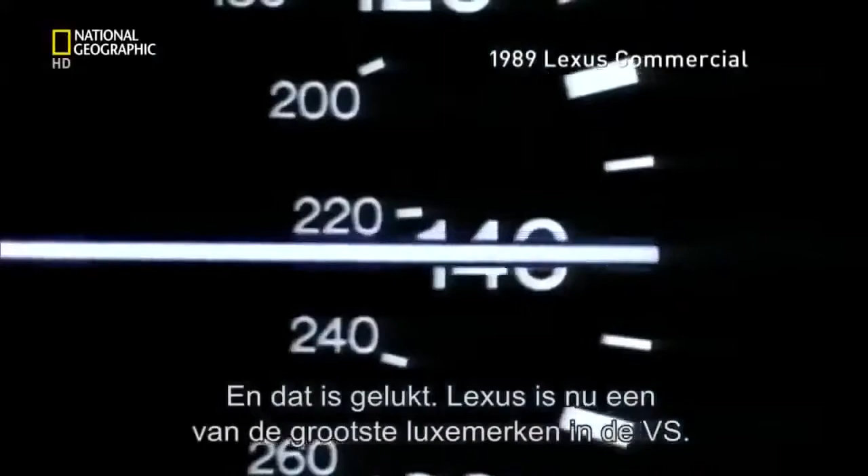Lexus is just over 20 years old. The world's largest car maker, Toyota, created the brand to compete with other high-flying luxury marques, Mercedes-Benz, BMW, and Jaguar. It's worked. Lexus is now one of the biggest-selling high-end marques in the United States. But now, Lexus is out to inject more excitement into their brand.

Chief Engineer Tanahashi Haruhiko is the man behind this vision. The LFA has a passion, an emotion that isn't in earlier Lexus cars. We wanted to move the brand in that direction. That's how we made this car. Tanahashi believes the marque can mean more than just luxury.

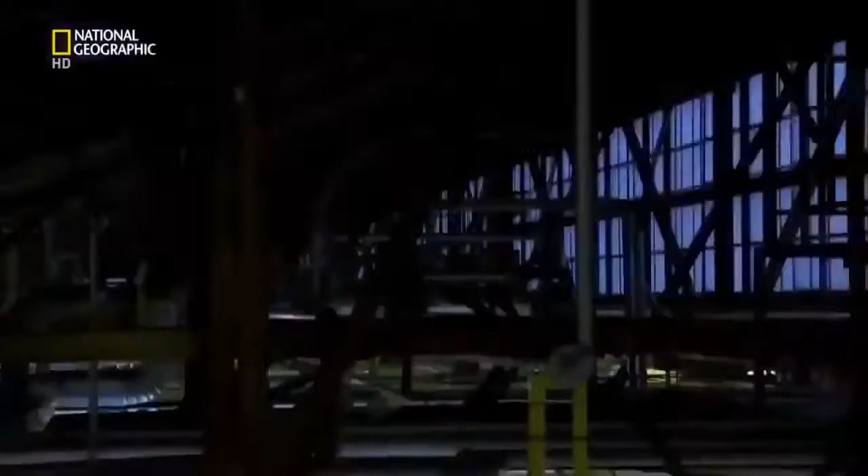I wanted to make a new sports car, one that could stand against the long-established European so-called supercars, Porsche, Ferrari, and Lamborghini, to show that we Japanese could make something like that. It's a risk. The company haven't made anything like this before. Their reputation depends on its success.

Chief Engineer Tanahashi is stepping into the unknown. He must build a car, a team, and a factory from scratch. Basically, we proceeded at my discretion. And where there weren't any rails, I laid them down.

Finding a factory in Japan isn't hard when you're part of the country's largest company. Toyota is so big, they even have their own city, Toyota City. Of the company's 15 Japanese factories, 10 are found in the city or close by. Among them, the Motomachi assembly plant. The company transformed two unassuming blocks of this megafactory to create the LFA. They then scoured Toyota's 50,000 Japanese workforce to handpick just 175.

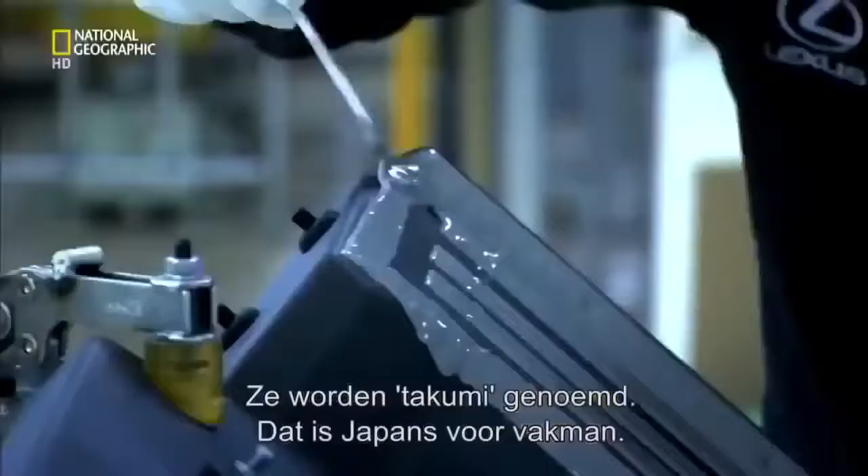All the associates here at the LFA Works feel they are artisans, not just operators. These artisans are known as takumi, Japanese for craftsmen. A status only conferred on the most highly trained, skilled workers. Each and every associate at the LFA Works is seeking to achieve perfection, taking this challenge on with a sort of samurai spirit.

Yamanaka Shigeru is manager of the LFA Works. His teamwork credentials come from another time-honored Japanese tradition, baseball. Before this, I was working as manager of the Toyota Motor Corporation baseball team, which brought people together from lots of different... It was because I could manage that organization that I was made manager here.

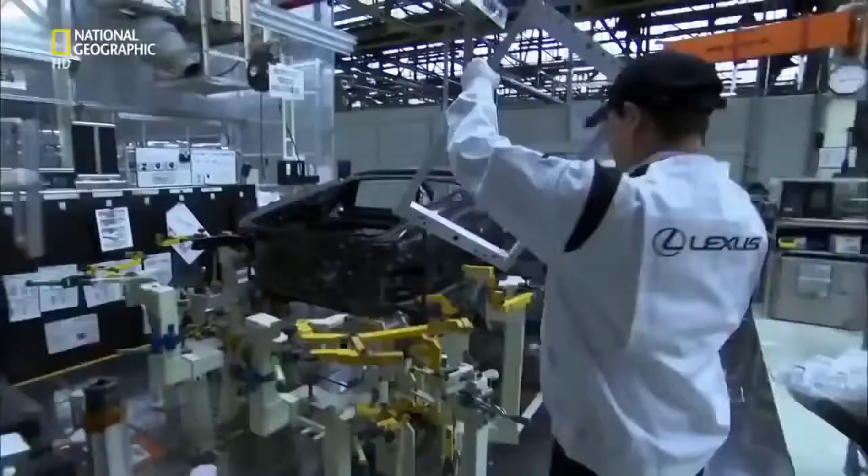To reach their goal, the tight-knit team utilize sophisticated tools and materials to build the car. The most important of these is carbon fiber composite. Carbon is crucial to the car's performance. It's a material 5 times the strength of steel, yet a quarter lighter. It's the construction material of choice for both Formula One racing cars and the aerospace industry. The company even make their own carbon fiber here on site. Up until now, no television cameras have ever been allowed inside this top-secret facility.

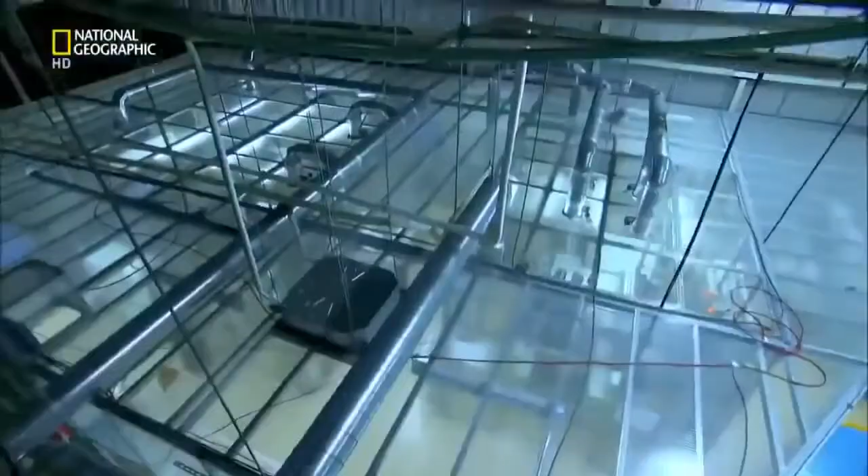First, simple strands of carbon fiber are woven into a pliable cloth using an automated weaving machine. This fabric is then transformed through heat, pressure, polycarbonate resin, and labor-intensive techniques into the car's core known as the tub. The tub is pieced together like a 3D jigsaw.

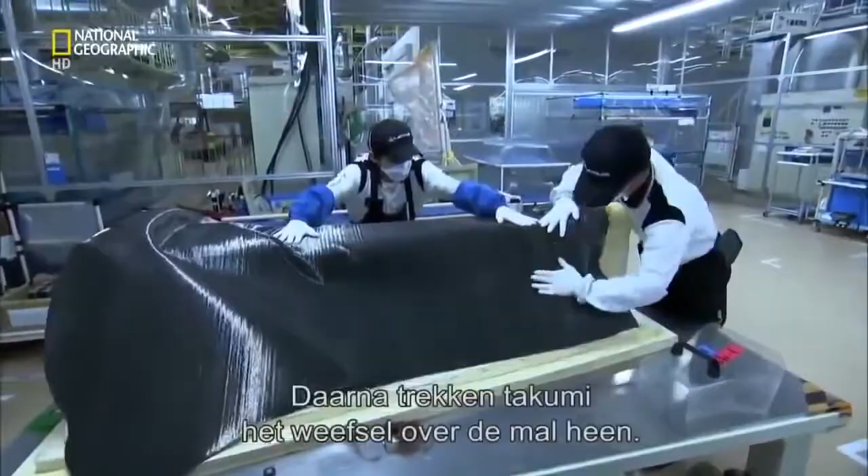It starts with the construction of the floor. To make it, precisely cut carbon fiber cloth is lifted onto a mold. Next, skilled takumi smooth the supple fabric over the mold. This one is for the transmission tunnel that will house the drive shaft and exhaust.

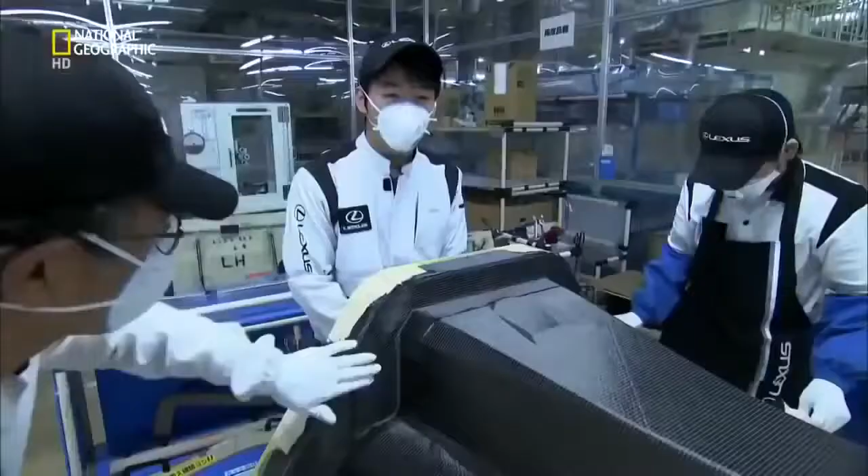In very complex areas like this, the fabric inevitably becomes frayed and not very neat. The associates work with these areas as if working with silk, taking great care every day. They also wear masks to avoid breathing in the hazardous fibers. In the beginning, the associates found it very difficult to work this material. It was much easier when they used an iron.

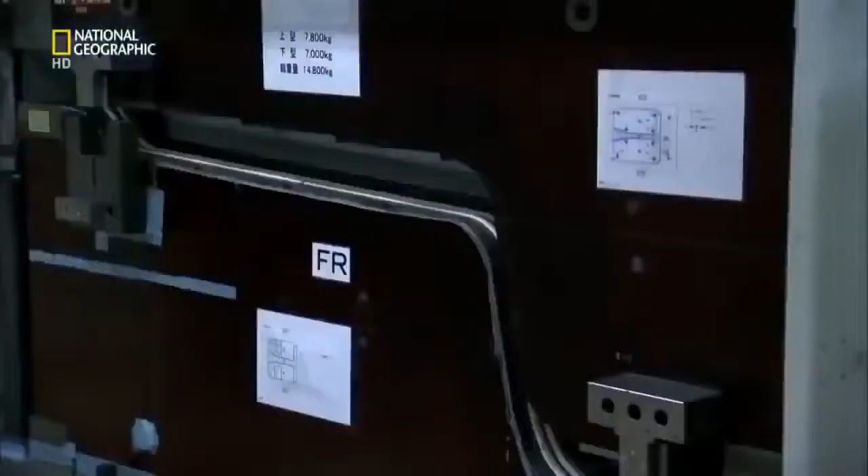The completed part is pre-heated to set its shape. It's then fitted into a template, along with 7 other floor parts, and inserted into a 1,000-ton press. A glue-like resin is pumped into the template, and the whole section is then baked for 8 hours at 130 degrees Celsius. Under this pressure and heat, the resin sets hard, binding the individual parts together to produce the car's floor panel.

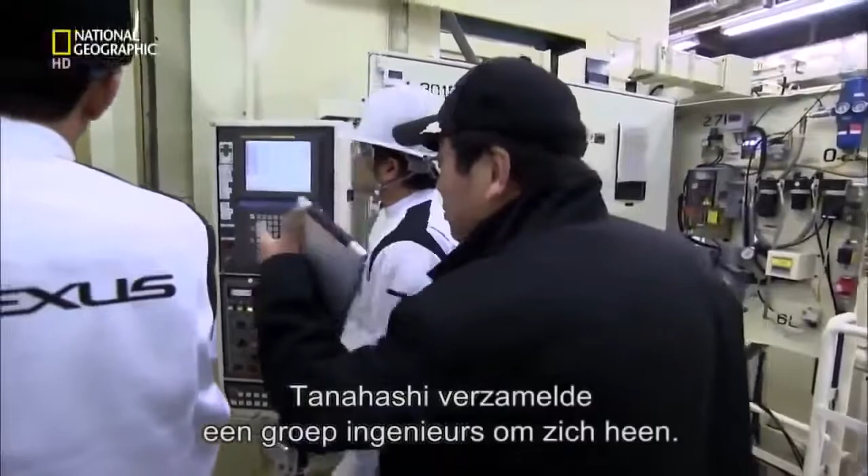Back in 2000, the concept of a world-beating supercar only exists in one man's head. At the company, I talked to just a small group of people at the top, not expecting anything, and they said, go ahead and try. With permission to proceed, Tanahashi gathers a team of engineers around him, and they start to make the basic engineering decisions. In the beginning, we planned to make the body from aluminium.

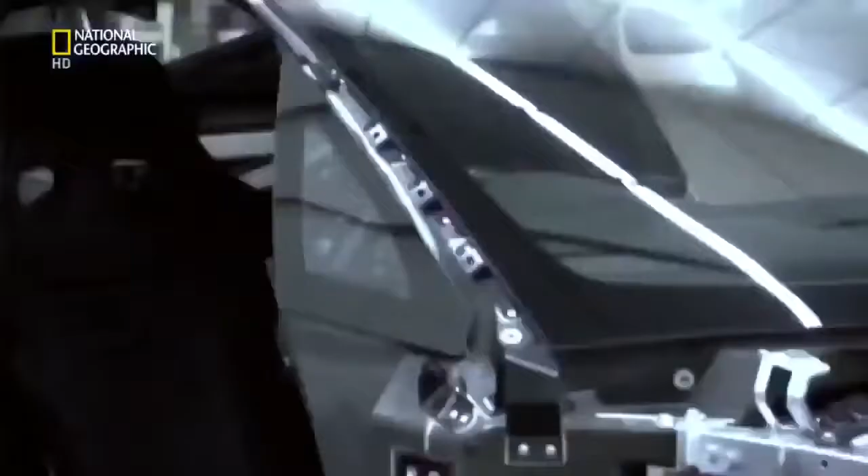But Tanahashi is fascinated with the possibilities offered by carbon. Developing a supercar, a super sports car, carbon fiber was a material I really wanted to try using, if at all possible. But this wonder material has its drawbacks. It's expensive, and the company has never used it to build any of their cars before. Despite these significant challenges, Tanahashi gets his way.

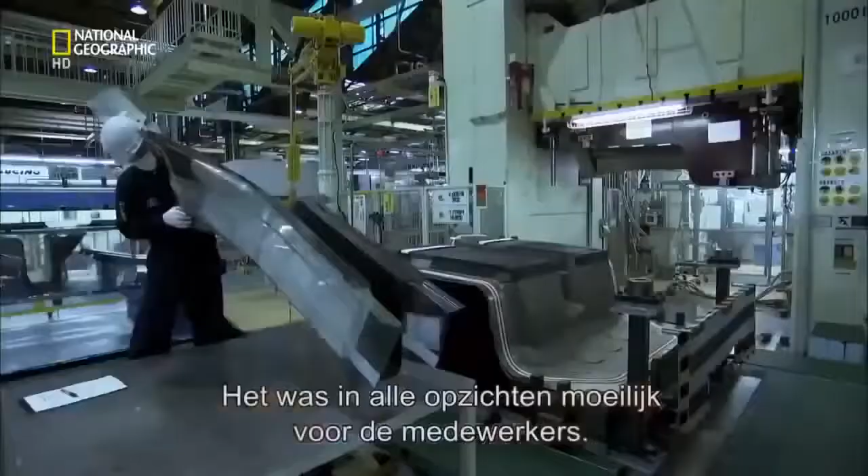In 2005, my boss said, why not go for carbon? Slapping me on the shoulder. And I made the decision to go for carbon then. It's a bold step. Everyone involved with this project must master a material they have no experience with at all. It was the first time the workers had touched carbon, and everything about it was difficult for the workers.

In the state-of-the-art carbon fiber facility, the Takumi are returning from lunch. They vacuum themselves down to remove any foreign particles before entering a highly confidential sealed room. Here, the majority of the tub's central frame is created using the most intricate techniques. In this process, an automated laser cuts out hundreds of individual shapes from carbon fiber cloth that's been pre-impregnated with a sticky resin.

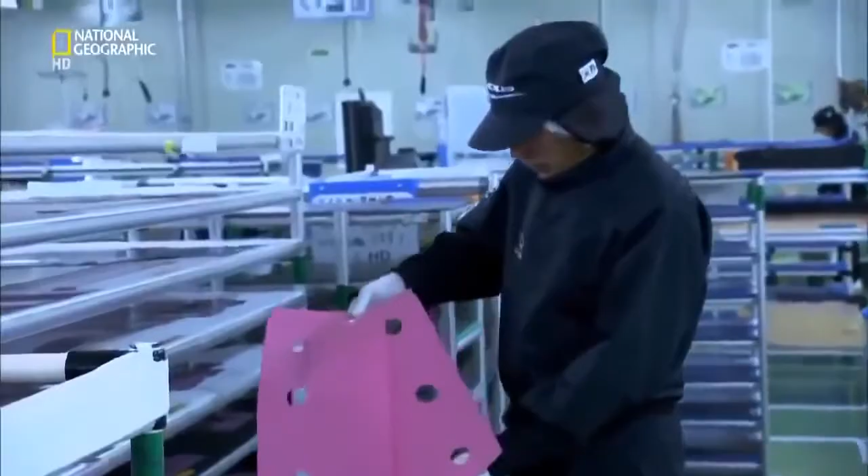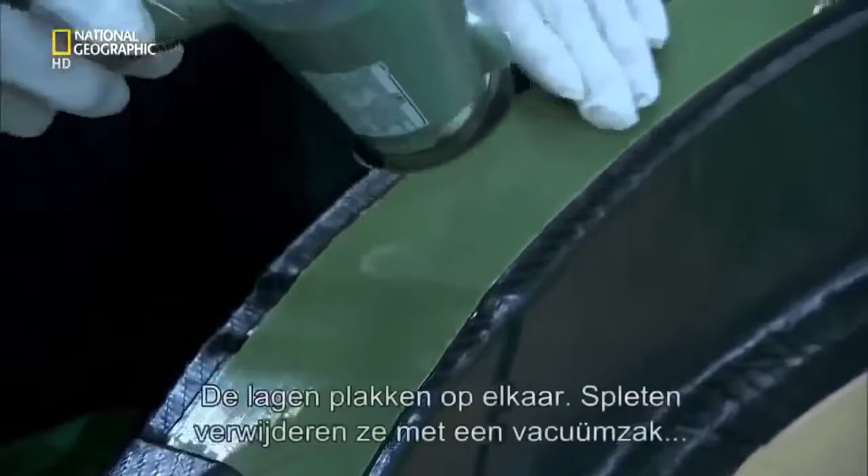Next, Takumi layer the cutouts, up to 20 sheets deep, onto a mold. This one will make the right side panel. The associate uses a dryer to raise the temperature of the laminate and half melts the resin as he applies it. The tacky cutouts stick to each other and any gaps are squeezed out using a vacuum bag that forces them together.

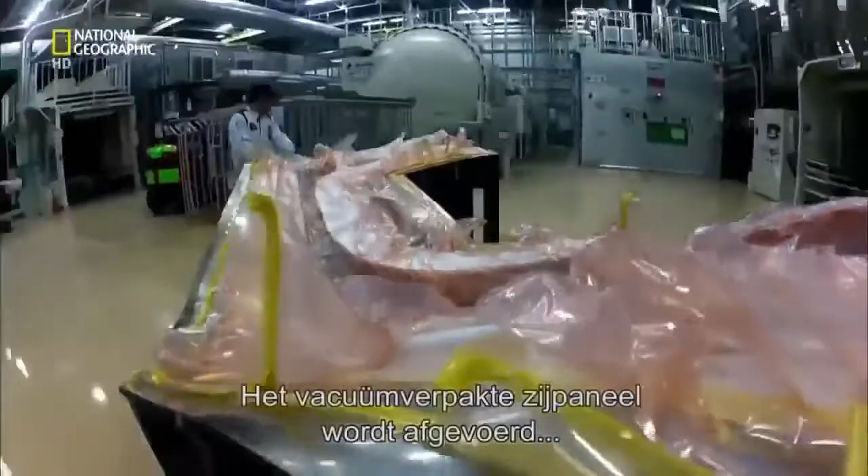The shrink-wrapped side panel is then wheeled across the works and loaded into a pressurized oven. Baking overnight at 150 degrees Celsius sets the resin, resulting in a side panel that's both ultra-strong and ultra-light. An aluminium equivalent would be twice as heavy. Weight saving is the holy grail for all auto engineers. Less weight and more power leads to increased acceleration, and speed defines a supercar.

The body of the LFA is 65% carbon fiber, helping it accelerate from 0 to 100 kilometers per hour in 3.7 seconds. If made of aluminium, it will be 100 kilograms heavier, like having a sumo wrestler in the passenger seat. As it is, this car weighs just 1,400 kilograms all in.

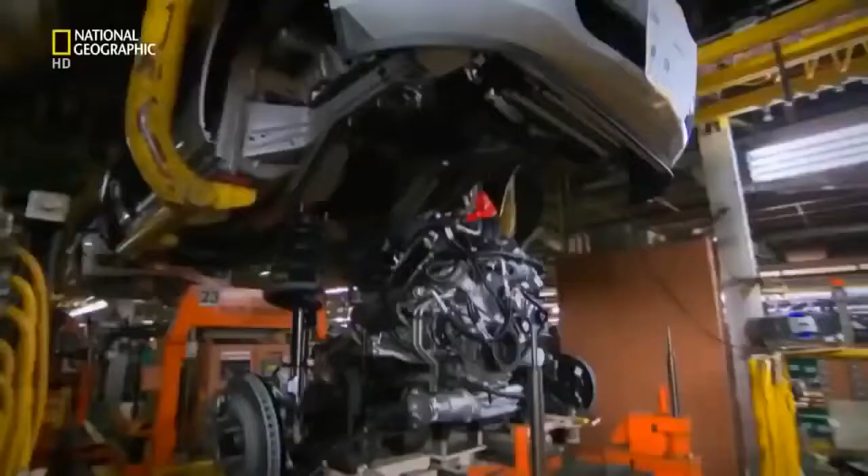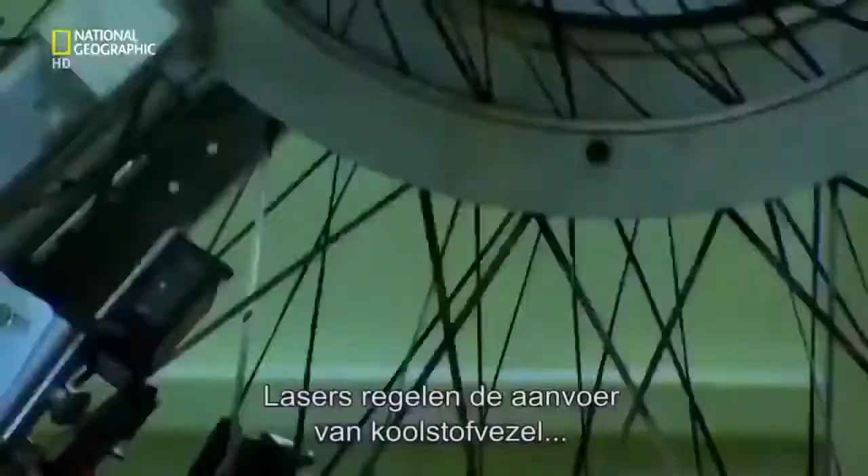Back at the factory, in a locked room, a bespoke machine creates two crucial parts to complete the tub's construction. The roof rails support the windscreen, as well as protecting the driver if the car rolls over. This custom-built circular loom weaves the carbon rail in 3D. It uses lasers to control the feed of carbon fiber strands onto 144 bobbins. These knit the carbon around a top-secret automated template that's fed through the center of the loom. This is done twice over to cross-hatch the carbon weave, so giving the rail its strength.

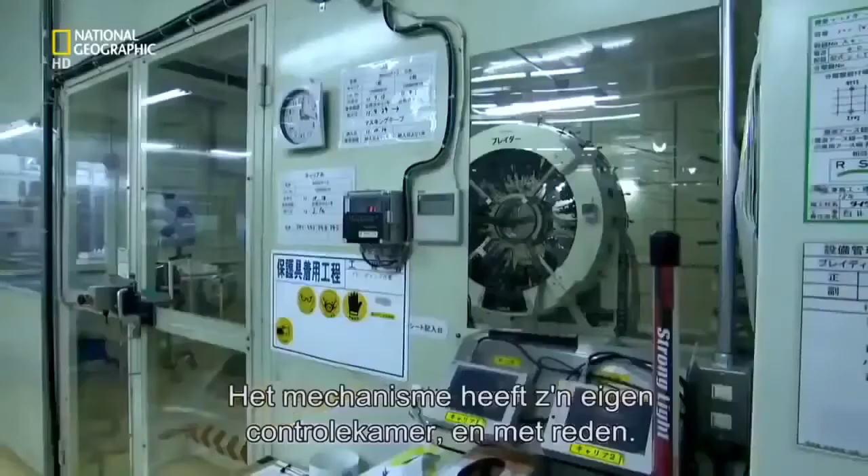The whole mechanism has its own control room, and for good reason. If something goes wrong, even a little thing, the shape gets distorted immediately, so the operator constantly pays attention to avoid this. The roof rail is heated and impregnated with more resin to complete its metamorphosis from a flexible tube to a rock-hard rail. You may think that this is quite heavy, but it is only 2 kilograms.

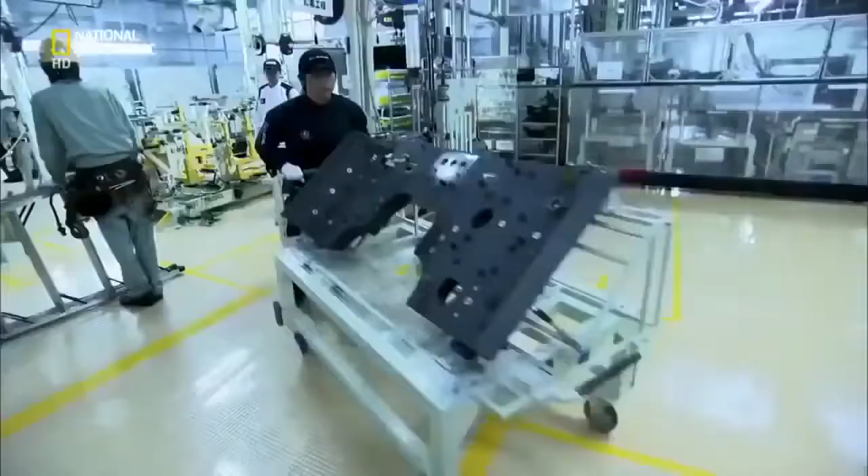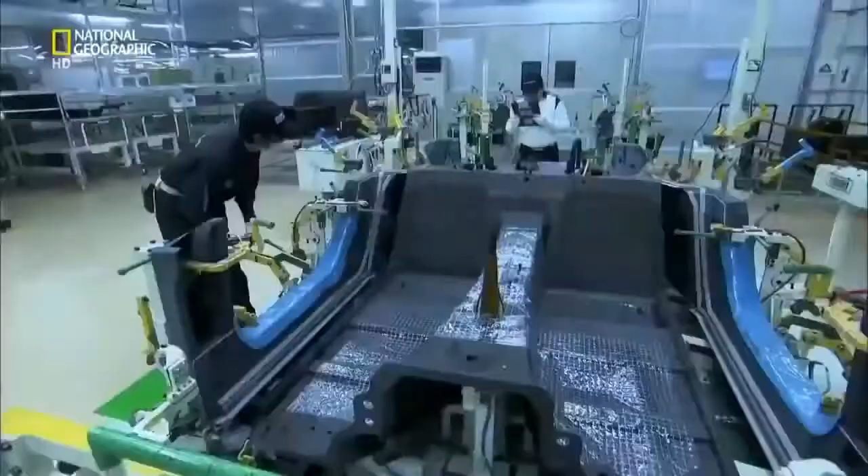The tub is bonded in another top-secret jig. First, a super-strong adhesive, known as epoxy resin, is applied by robot and hand to each of the parts. The separate parts are transferred to the jig and locked in place. Pop rivets keep the pieces aligned. To cure the epoxy, the jig is pushed into an oven and then baked for 60 minutes at 60 degrees Celsius. The resulting tub is so strong, it acts as both the structural core of the car and as a crush-resistant safety cell, should the car crash.

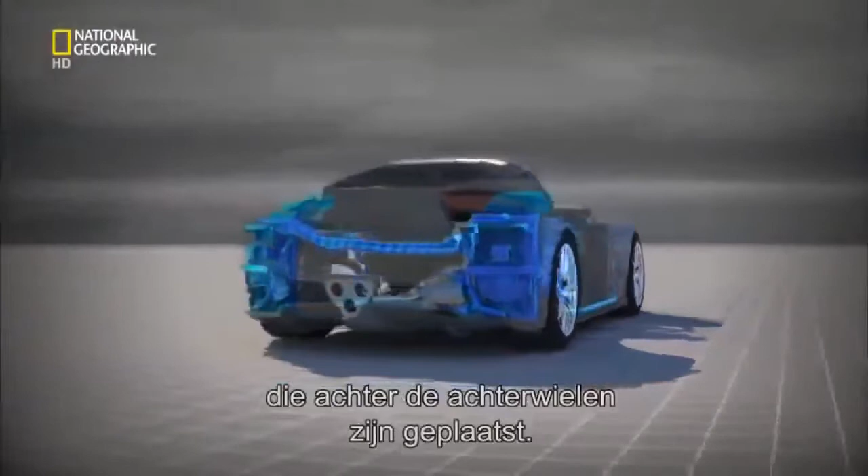The challenge now is for Matsumoto Kengo, chief designer of the LFA, to create a car with a body as technical as it is elegant. For us, aerodynamics, heat and airflow management should be tangible in the design. A conventional car cools its engine with forward-mounted radiators that suck cold air through a front grille. Not the LFA. Front space is at a premium, so coolant is pumped from the hot engine to twin radiators mounted behind the car's rear wheels. Matsumoto had to shape the car to funnel cold air to these vital components.

Airflow management is optimally controlled by setting the angle between the door mirror and the cabin. It goes past the cabin and smoothly into the air intake for the rear radiator. This shape is not just for styling. The intake is deliberately formed here, from the base of the glass. The result is an airflow system capable of cooling the engine even under the most extreme race conditions.

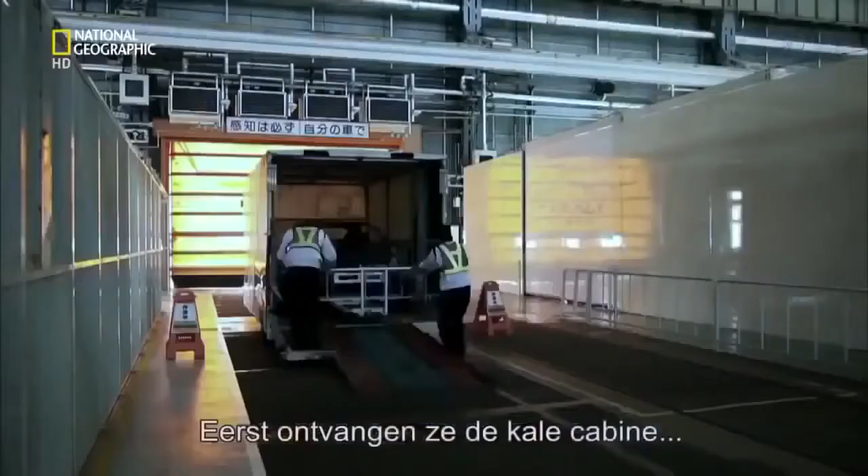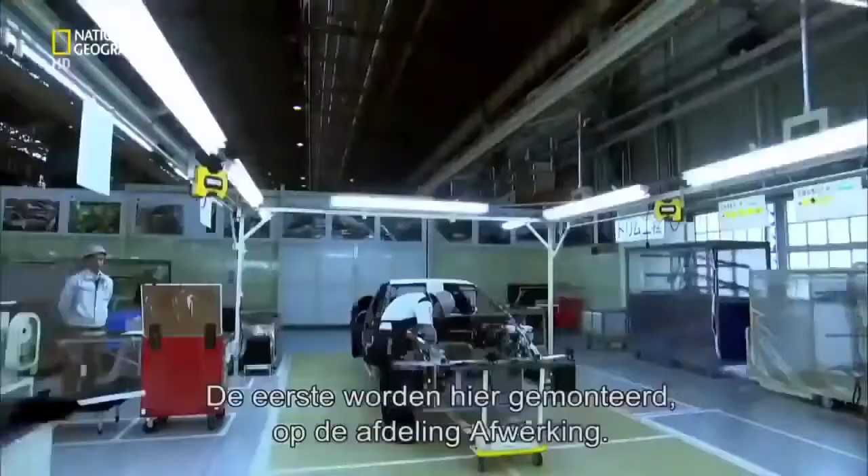It's 8:45 in the morning at the LFA works. The Takumi are warming up for an 8-hour shift ahead. Their first task is to greet the bare cabin as it arrives from its 15-day build in carbon round the corner. In assembly, the cabin will progress through 4 positions: trim, chassis, final, and alignment. 15,000 parts go into making an LFA. The first of these are attached here in trim.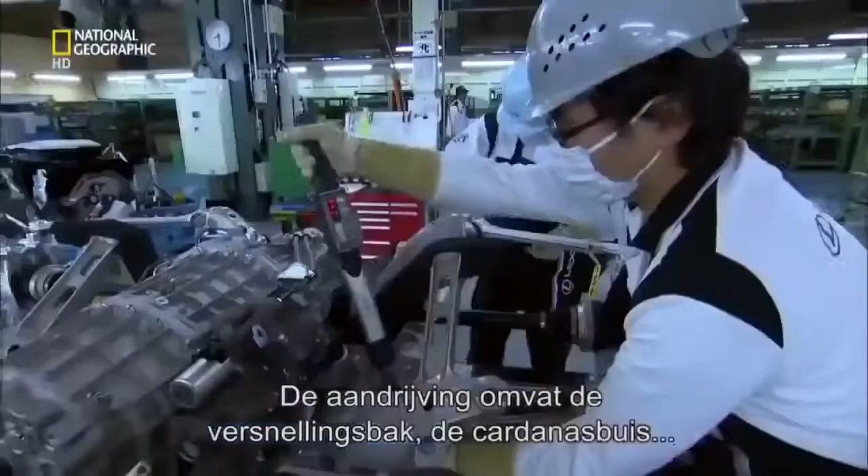Just meters away, other Takumi assemble the drivetrain and suspension. The drivetrain comprises the transmission, torque tube, and last but not least, a 4.8-litre V10. The location of this engine is crucial to the car's entire concept.

I wanted to build the car around the people in it. And for a supercar that puts people first, the optimum place for the engine is front mid. This front mid location puts the engine between the driver and the car's front wheels. With the transmission placed at the rear, the driver is in the center and the car feels balanced to drive.

The aim is to make the car's handling as good as possible. But a front mid configuration dramatically restricts the space available for the engine. Tanahashi has a problem. You need an engine of a certain size with a certain degree of compactness, but you want a high-powered engine as well. Tanahashi needs a small engine to fit in the restricted engine space, but he also needs the power of a large engine because power equals speed.

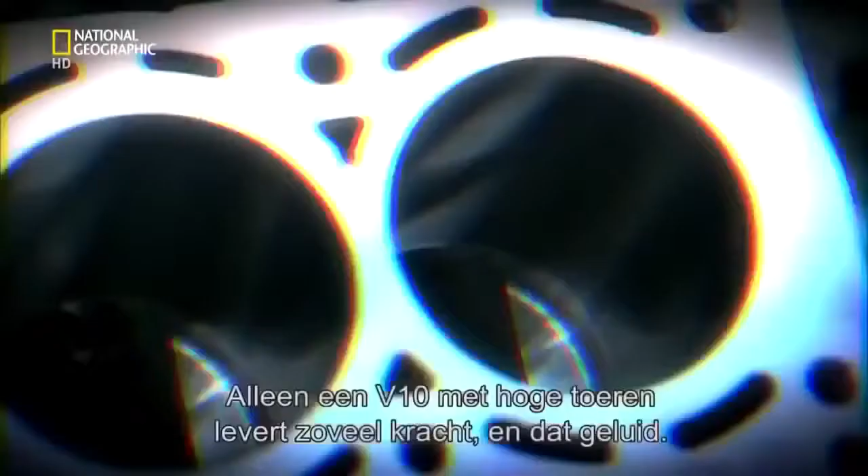And that isn't all. The high-pitched sound of Formula One makes you shiver, doesn't it? I really wanted to have that as part of the LFA. Only a high-revving V10 engine supplies this combination of power and sound, but a traditional V10 is too big for his mid-front configuration. Lexus have made nothing like this before. Their production line cars use 6- and 8-cylinder engines engineered for a super quiet ride. This V10 will be the opposite.

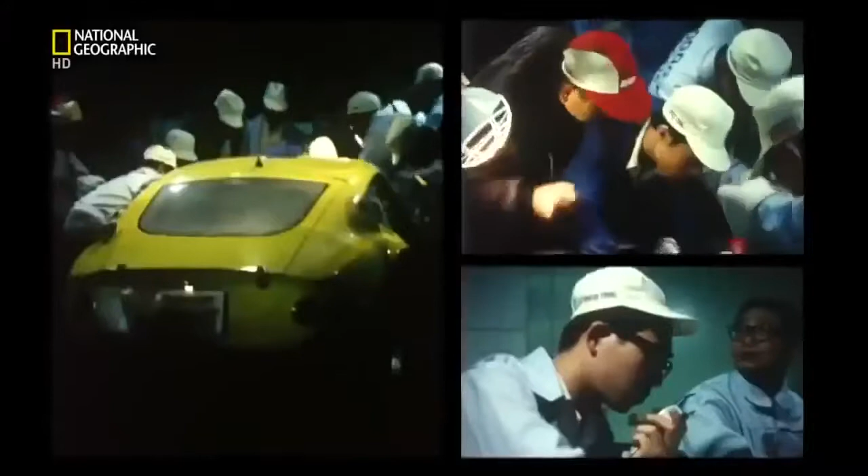Tanahashi turns to some old friends for help. We are a motorcycle manufacturer. We understand power alone is not enough in a vehicle. For a sports car, small and lightweight is critical. For almost half a century, Yamaha have worked with Toyota to create high-powered, lightweight engines and cars. The legendary 2000 GT, star of the James Bond film You Only Live Twice, and Japan's first true sports car, was the first fruit of their collaboration.

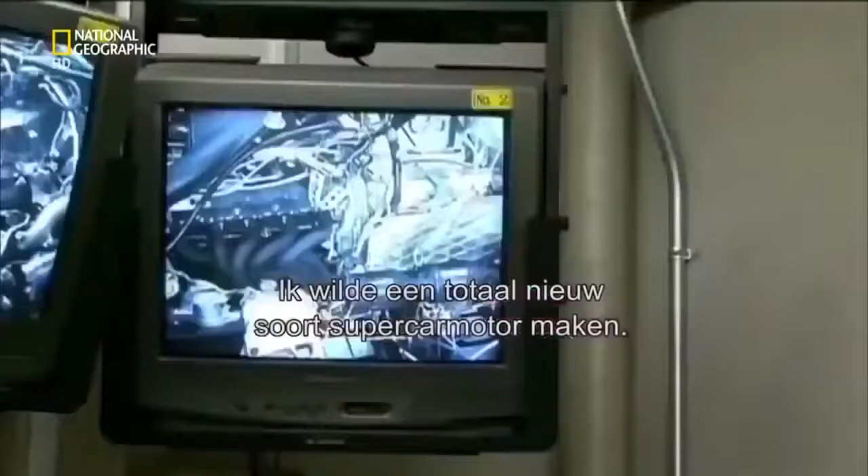Headed by Lexus engine guru Okamoto Takemitsu, the team sets itself an ambitious goal: to create a naturally aspirated V10 engine as compact as a traditional Lexus V8, with the weight of a V6. I wanted to create something different to any other supercar engine. Normally, engineers use turbochargers to boost the output of smaller engines to simulate V10 power. But turbocharged engines don't have the rapid response, acceleration or sound of a naturally aspirated V10.

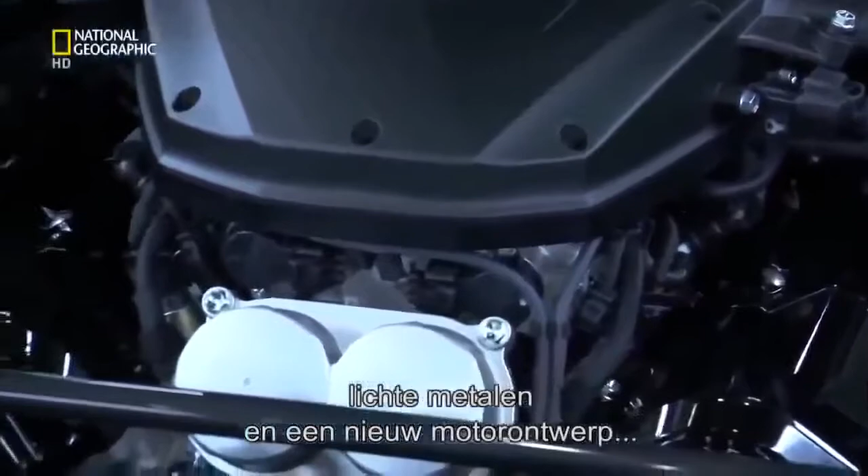By using Yamaha's motorcycle know-how, the lightest metals, and redesigning the engine's guts, Okamoto creates a masterpiece of engineering. A non-turbocharged compact V10 that fits into a mid-front design while keeping weight to a minimum.

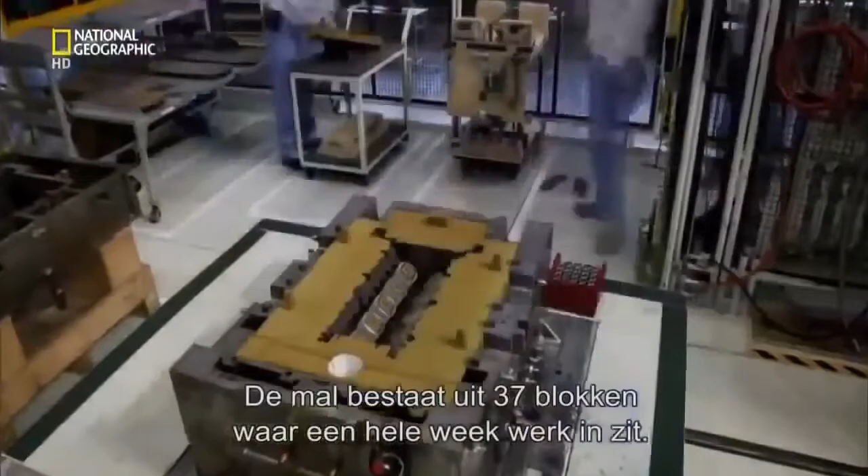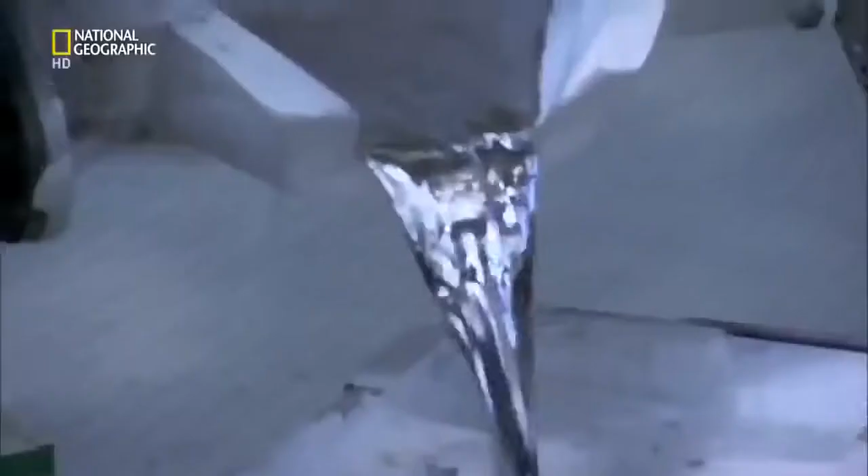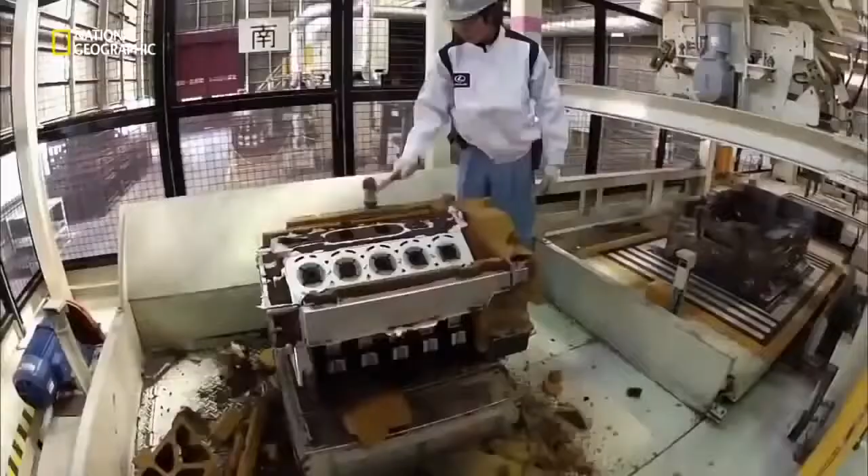The engine starts life in Toyota's Miyoshi plant as molten aluminium. It's cast in a 3D resin-impregnated sand mold made from 37 individual blocks that take a week to fashion. With the blocks fitted together, the mold is ready to be filled. At 750 degrees Celsius, impurities are scooped off the top of the molten aluminium. The liquid metal flows into the mold as a vacuum sucks out any contaminating gases. Two hours later, with the metal set, the sand is hammered off to reveal the solid aluminium engine block inside.

It's off to Toyota City's Honsha factory and the company's highly confidential Formula One engine facility. These works are always off limits. We're going to go in. Are you ready? Come in. Television cameras have never been allowed in here before.

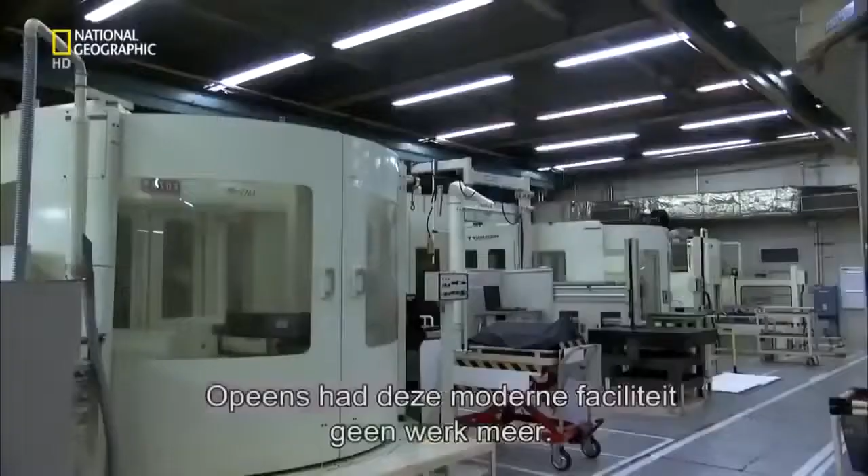For a decade, Toyota spent big competing in Formula One racing. But without a win in 139 races, they withdrew in 2009, leaving this state-of-the-art facility idle. For the LFA team, it was too good an opportunity to miss. The close parallels with F1 engine technology make this milling facility a ready-made fit.

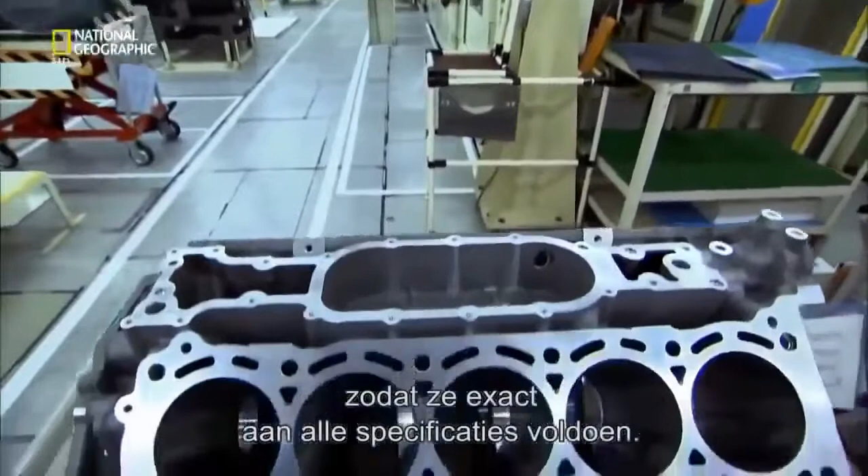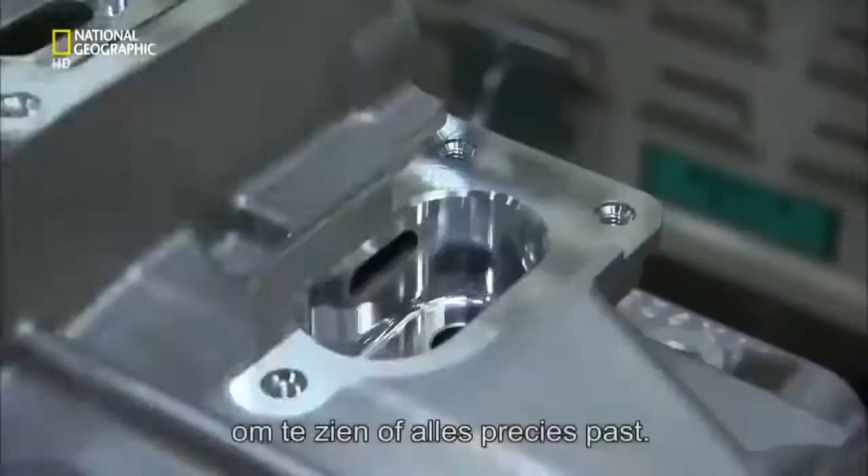In these million-dollar automated machining tools, the rough engine casts are milled, drilled and polished before emerging as precisely spec'd engine blocks. Then the robots hand over to humans. In a sealed room, Takumi hone every sharp edge using precision polishing tools. Finally, a highly skilled Takumi pre-assembles the finished engine blocks to check they fit precisely. These blocks and screws are paired for life.

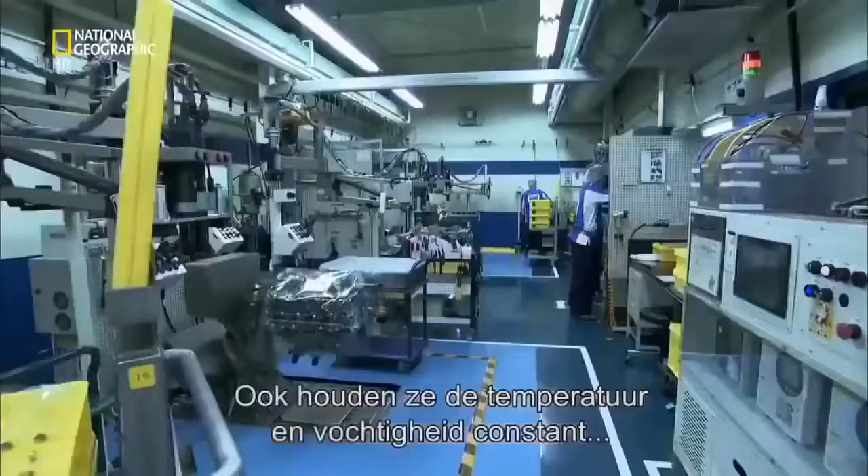Disassembled, they travel as a unit to Yamaha's Iwata city plant, 90 kilometers southeast of Toyota City. The engine room here takes obsession to new heights. As you'd expect, hairnets and airlocks prevent any particle contamination. But the room is also kept at a constant temperature and humidity to ensure that every engine part is at the same state of thermal expansion during assembly. This is more laboratory than workshop. The 2,200 engine parts are divided into 61 different kits for assembly by number.

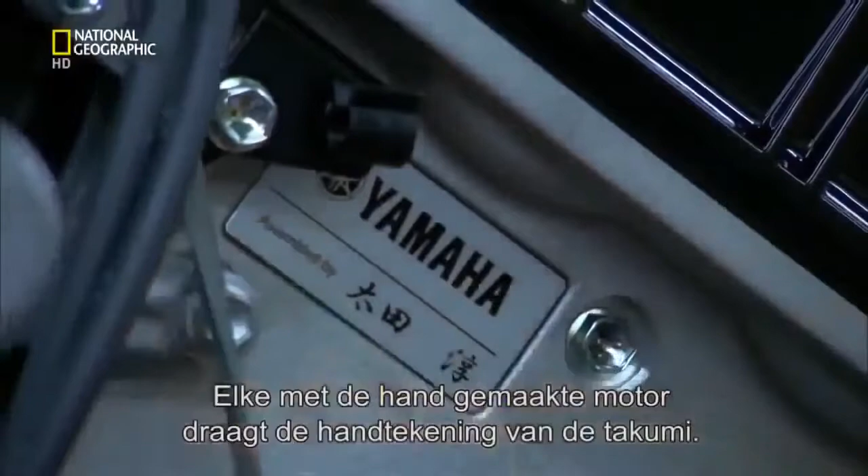Each hand-assembled engine bears the Takumi signature. Before this masterpiece goes anywhere near a car, it undergoes a half-day of exhaustive testing in the room next door to engine assembly. The resulting 4.8-litre engine is so responsive that it takes just 0.6 seconds to reach 9,000 RPM. That means instant acceleration, whatever gear you're in.

This engine has excellent response and more RPM than any other commercially available engine. Response time is so fast that a digital rev counter is the only unit able to keep up. And the sound of this high-revving engine is unmistakable. The sound of the LFA is unique, and once heard, never forgotten. To achieve the engine soundtrack that Tanahashi insists upon requires more of Yamaha's specialist knowledge.

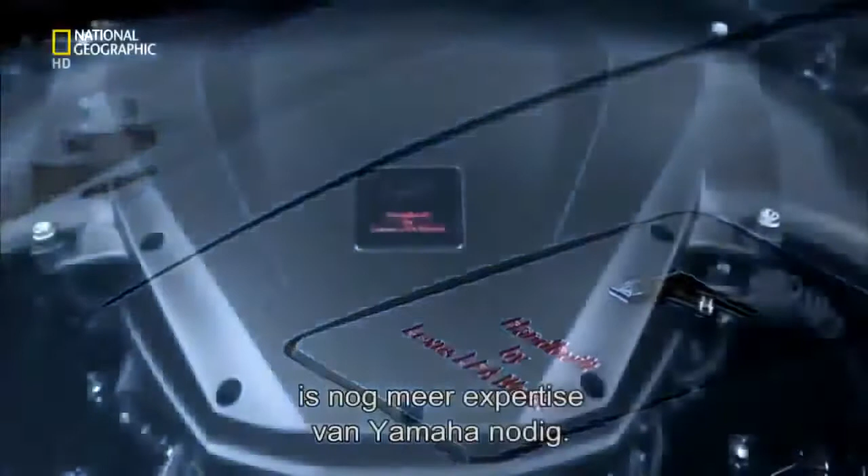We are a manufacturer of musical instruments, so when it comes to sound technology, we have a certain level of know-how. Honji Yoshikazu is obsessed with sound. I think the relationship between a super sports car and its driver is like the relationship between a top musical performer and their instrument. When they play in a certain way, they can listen to that sound and use it to produce another, better sound.

Critically, a car has two different sound characteristics. One sound is the exhaust. You can call it an iconic sound. Just by hearing that sound, you know which car it is. The other, which we were particularly concerned with, is the sound heard by the driver.

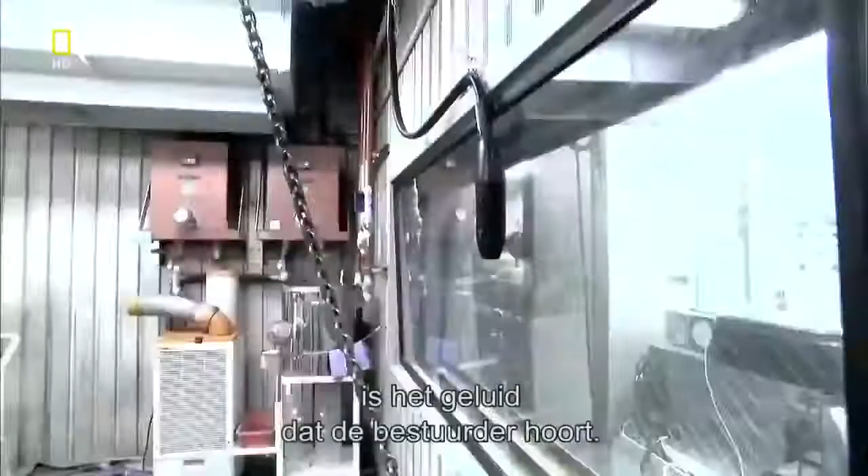To refine the driver's soundtrack, Heiji Maruyama, general manager of Yamaha Motors, had to redesign the component that sits on top of the engine, called the surge tank, by turning convention on its head. The function of the surge tank is to send air equally into all 10 cylinders. Normally, techniques to reduce noise from the intakes are used. We thought to go the other way and use it to amplify the sound, to communicate it to the driver.

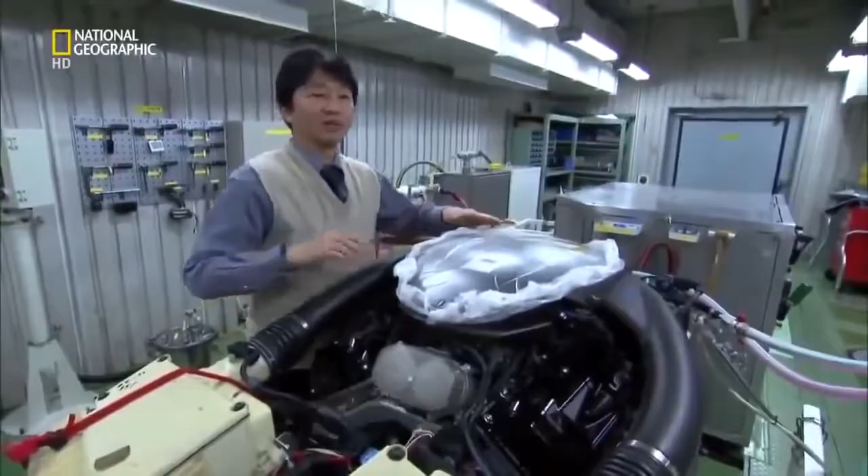Maruyama tunes the chamber by varying the thickness of the surge tank's upper surface and adding internal vibrating ribs. The construction is very like that of an acoustic guitar or violin. The team channeled these good vibrations back into the cabin using sound passages. We use these to send low-pitch sound to the driver's feet and higher frequency sounds through at ear level. The driver is in the middle of this dynamic surround sound system.

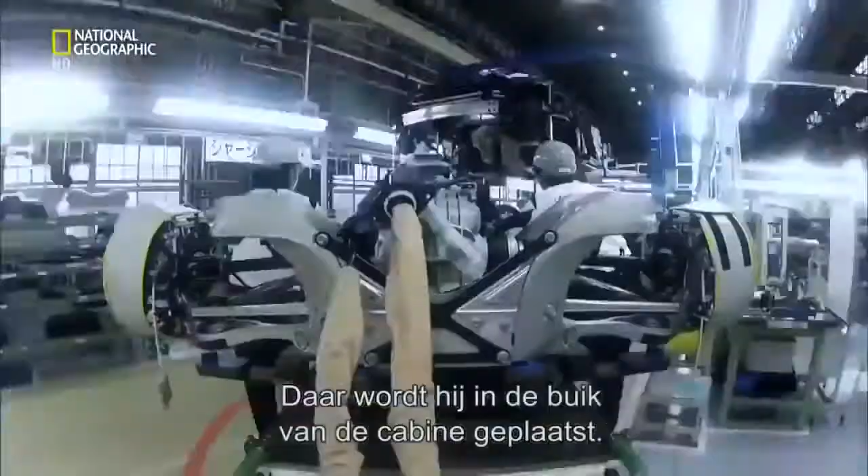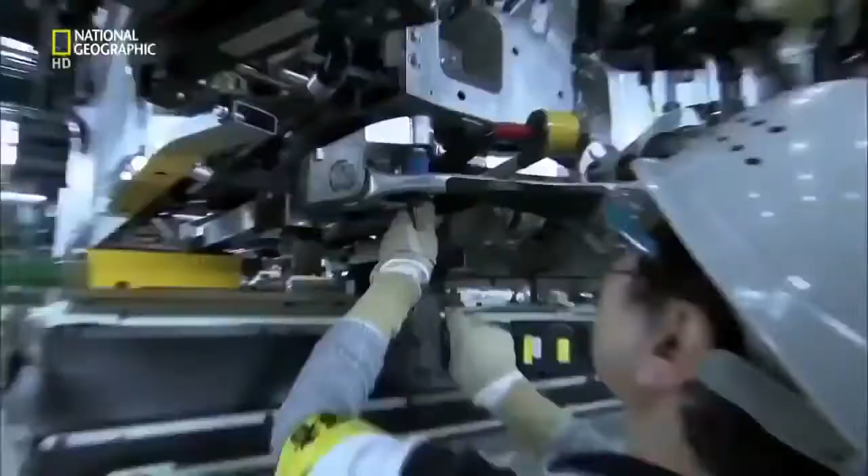The completed engine is forklifted onto a waiting truck for shipment back to the LFA works. Here, as part of the assembled drivetrain, it's inserted into the cabin's belly, guided only by eye. With the guts of the car in place, it's time to feed them. An automated pump injects engine oil, brake fluid and coolant into the appropriate underbonnet opening.

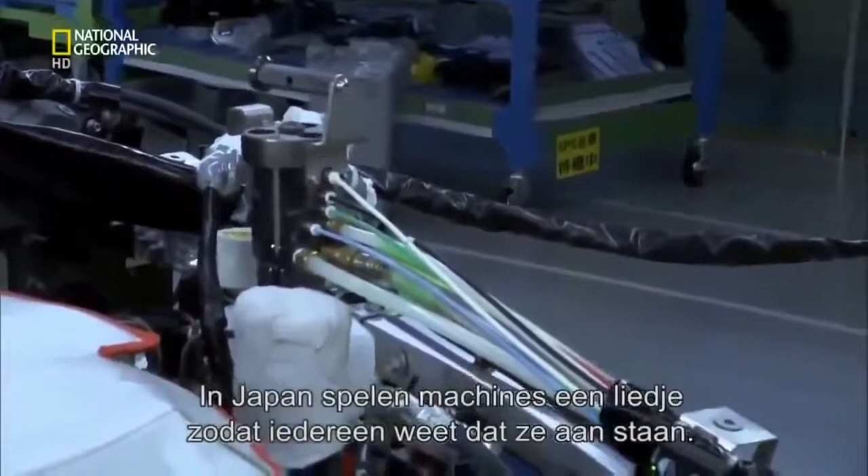In Japan, machines play a tune to alert anybody nearby that they're running. This one plays an American folk song. With the precise volume of fluid added, the pump stops, as does the music. The car's 9 moulded glass fibre body panels are manufactured off-site. This material is both strong and light, but far cheaper to replace than carbon fibre, should the car crash.

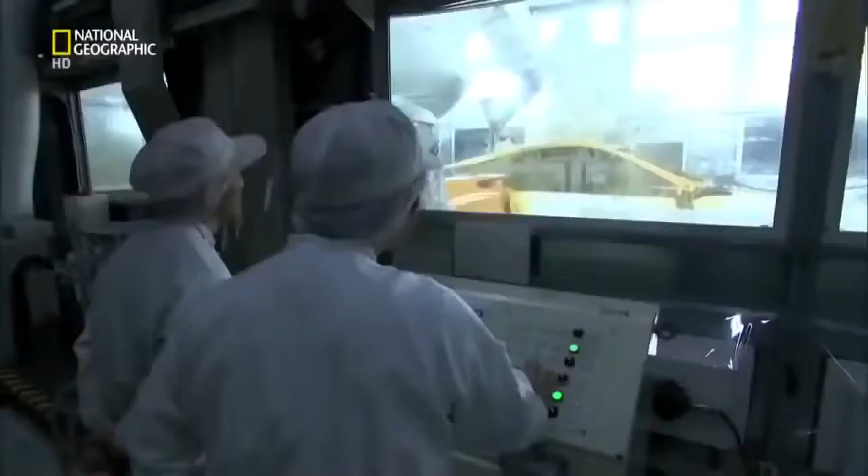The paint shop is under the same roof as assembly, but it's a very different world in here. At the LFA works, paint is one of the few production processes performed by robot. The company believes they give a more consistent finish. But there's always an ongoing human battle in the paint department. Dust is the greatest enemy for painting. If dust gets into the paint surface, when it's heated, the dust swells up and causes a blister. So the atmosphere is controlled on a daily basis, and there's a strict dress code.

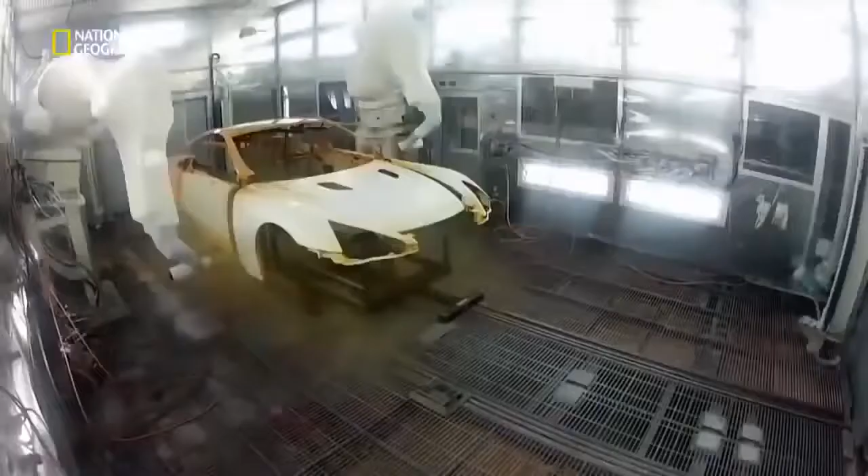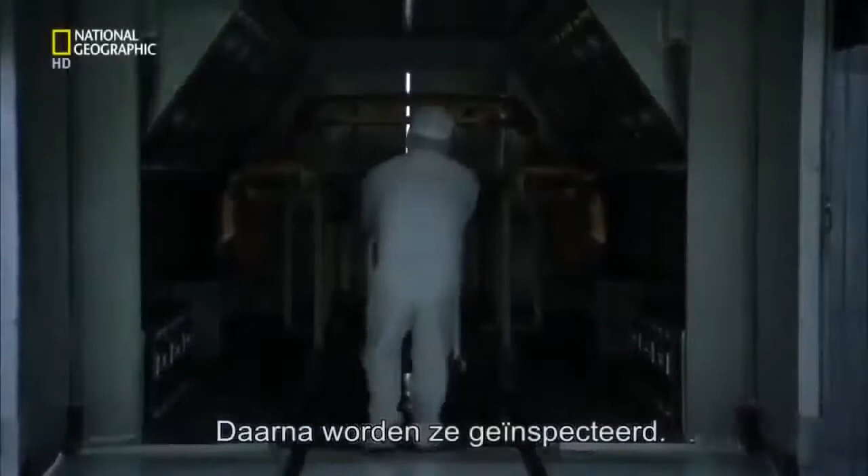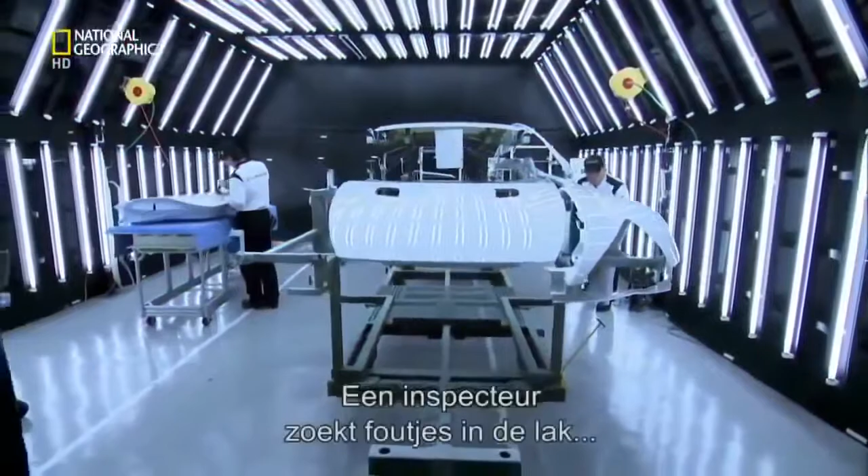Up to 5 layers of paint are applied. And where robots can't reach, humans can. Job done. The sprayed panels are dried in an oven at 100 degrees Celsius for 50 minutes before being wheeled out for inspection. The battle against dust continues, with water nozzles spraying a fine mist into the air to stop anything drifting onto the pristine surfaces. Under bright light, an inspector spots any blemishes and marks them up to be polished out.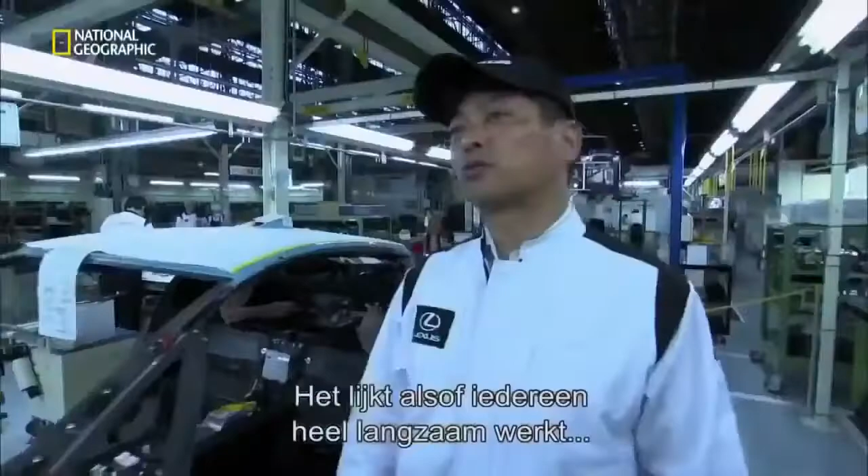The completed panels are wheeled out of paint across the factory floor and attached to the carbon tub back in assembly at the 3rd position on the line, known as final. Here, the hand-stitched leather interior is installed, and the forged aluminium wheels with bespoke Bridgestone tyres are also fitted. It looks as if the associates are performing each task very slowly, but every one of them is working very carefully and with a high degree of certainty. If you compare it to a sport, they are top players who complete a successful play every time.

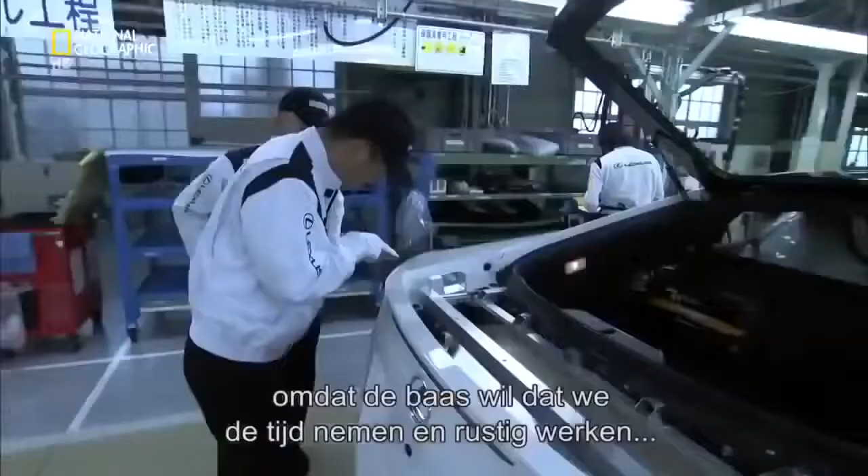The LFA works runs like clockwork, yet there's no clock watching. The reason why there is so much time is that Chief Yamanaka tells us to take our time and work slowly so that we can make something that we know is good. How can I put it? He says that in order to ensure quality, we can take as much time as we need. That goes for overtime as well. If it means we make something good, then we can do overtime.

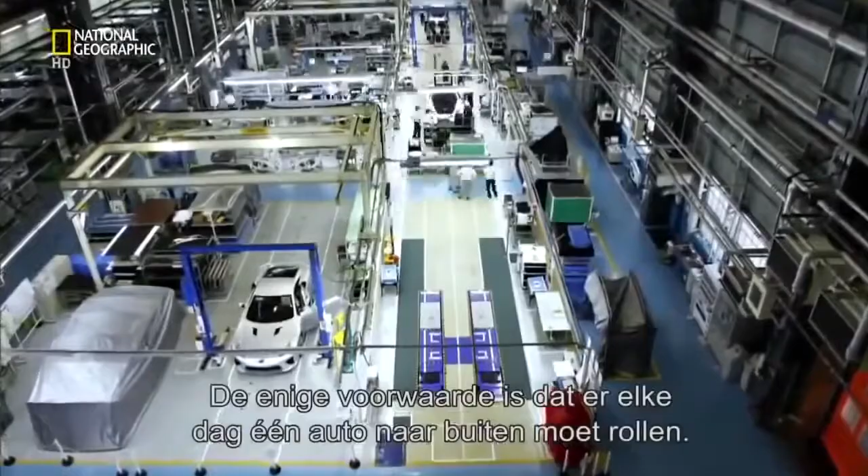The only stipulation is that one car must drive off this assembly line every day. And from the beginning, Chief Engineer Tanahashi was clear that only 500 would be built. At a car a day, that will take just 2 years. And then, this factory will close. Making only 500 cars positions the LFA as a very special car. There is no plan to make any more at all.

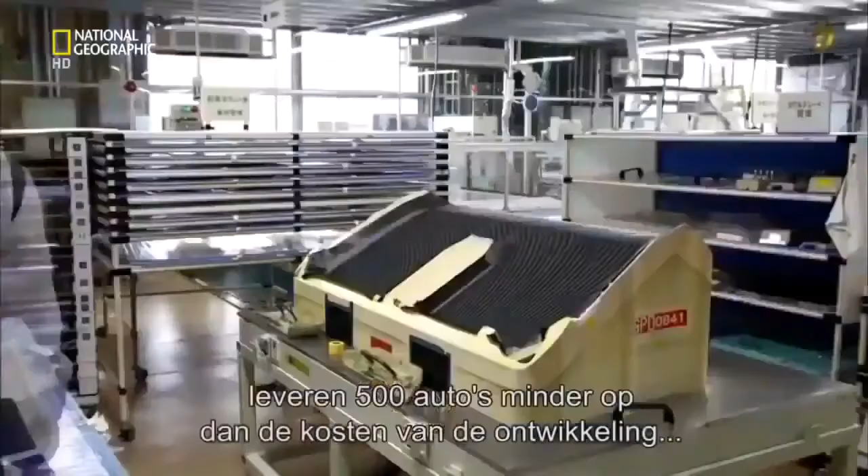Even pricing the LFA at $375,000, the most expensive Japanese road car ever, a limited production run isn't going to recoup the costs of development, the use of cutting-edge materials, and unlimited overtime. I think it will be difficult to make a profit with only 500 units delivered. But by producing the LFA, the Lexus brand gains in value and is well received worldwide. I think the legacy will be left in technique, knowledge and teamwork for making cars that will please our customers in the future.

Back in 2004, with the prototype built, Chief Engineer Tanahashi takes a bold decision. He wants the car proved on the severest of tracks. Nothing in Japan fits the bill. So he takes the entire development team to the notorious Nürburgring in Germany. For us car makers, the Nordschleife on the Nürburgring is like a mecca for cars. This is where this car was honed. The 20-kilometer Nordschleife section of the Nürburgring is infamous as the world's most punishing test track.

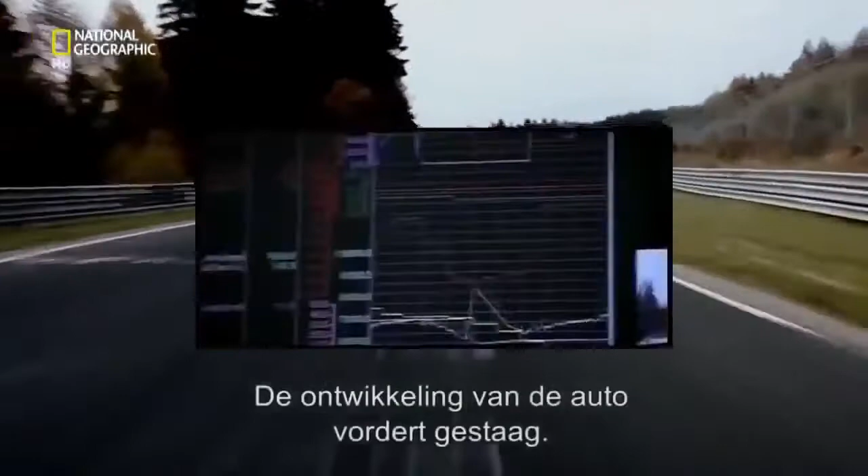For 4 years, the team tests every aspect of the car's engineering around the Nordschleife's dips, jumps, relentless corners, and flat-out straights. The car's development makes progress towards its production deadline, but Tanahashi wants to fast-track its fine-tuning. In 2008, he throws it into the unforgiving world of racing and enters the Nürburgring 24-hour race. It was purely to get more feedback on the production type LFA and to improve it under real race conditions. The brutal experiment works. A year later, the revised car wins its class. Tanahashi is finally happy, and in 2010, the LFA goes into full production.

And when in 2011, a special race edition of the standard LFA is launched, its name pays homage to the racetrack that forged it. It is with thanks to that sacred place that we called it the Nürburgring package. This Nürburgring package has a retuned engine which pumps out 571 horsepower, 11 more than the standard engine. This extra power requires more downforce to keep the car on the track, so the rear spoiler is larger and fixed. And left and right canard fins on the car's front bumper also increase downforce.

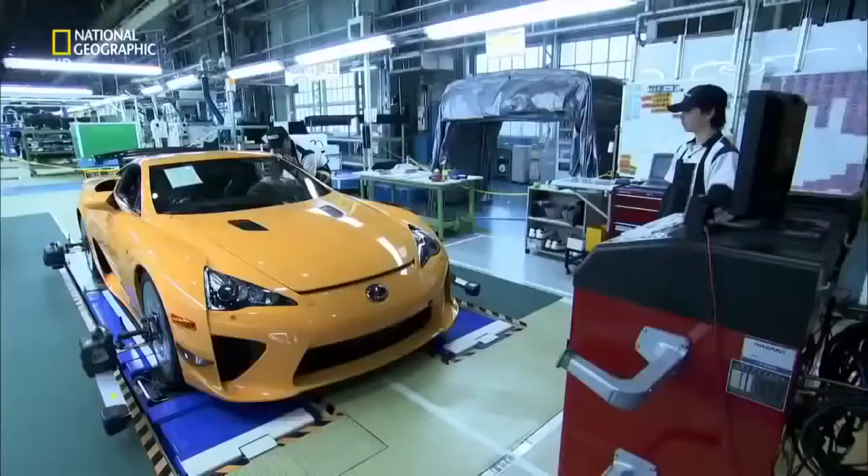The stiffer lower suspension makes it more suitable for a life on the track. Finally, to increase acceleration, the computerized transmission is upgraded to change a split second faster. It all adds up to a Japanese supercar. Only 50 will be built, each with a price tag $70,000 more than a standard LFA. Back at the LFA works, in assembly's last position, the wheels are aligned to ensure the car handles perfectly. After 3 days in assembly, the car officially moves to inspection.

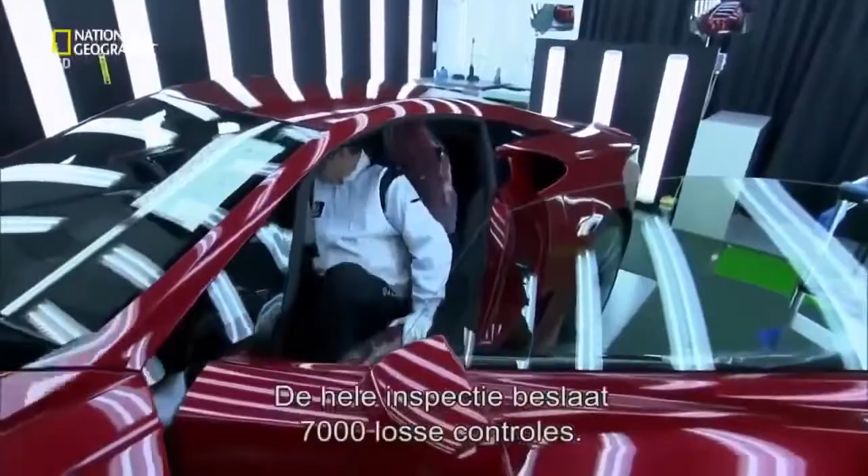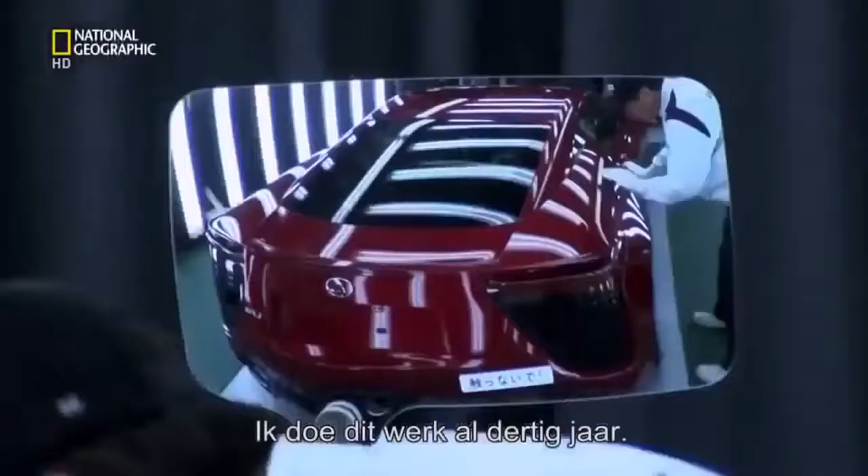The inspection process involves 7,000 separate checks. Hayashi Katsumi does the first of 1,482 of these under lights. Right now, I'm inspecting the paint surface. I'm using my hands to feel for any uneven areas in the bodywork. You have to touch it gently, like I'd touch a woman. I've been doing this job for 30 years. If I didn't have my wife, then it would certainly be my lover.

With the internal and external surface inspection signed off, the car leaves the LFA works for good. It's driven through the Motomachi plant into quality control. This will be its home for the next 7 days. The checks performed here range from speedometer and brake tests to water tightness. The reports fill a 350-page booklet.

Finally, test driver Amano Nobuaki ensures each of these cars is road ready when it leaves the factory. The car is bedded in on Motomachi's very own test track. The masked sections of the bodywork are to protect vulnerable areas from stone chips. I think this is the best possible job in the world. Amano checks the car's controllability, engine sound, power, braking performance, and vibration noise on the 1 kilometer track. There is one danger driving this car every day. Every now and again, I just want to forget the job and drive this car away somewhere to have for myself.

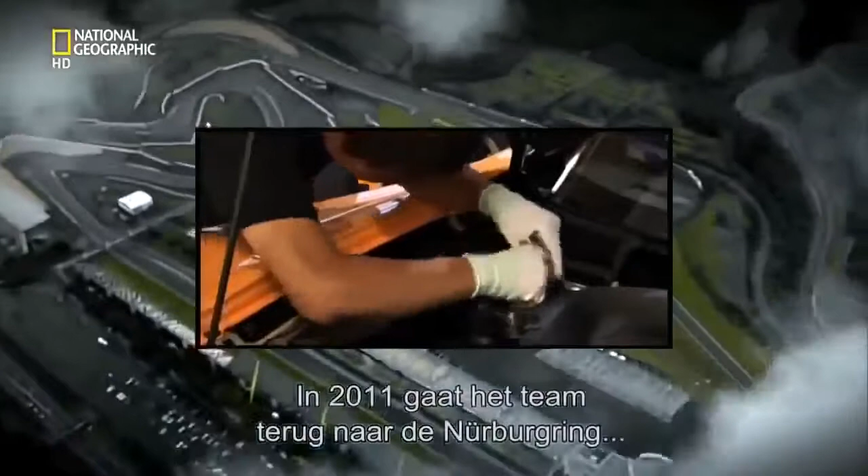In 2011, the team reassemble at the Nürburgring to put the car into the record books. They're out to beat the fastest official time by a road-registered production vehicle. This is the chance for the Nürburgring package to prove its pedigree. With test driver Iida Akira behind the wheel, the team held their breath.

I pushed the car on every corner. There are over 150 corners, driving very aggressively, but at the same time, I enjoyed it. To beat the record, Iida must average 167 kilometers per hour over the track's 20 kilometers. I had no concept of the time when I crossed the finish line.

Seven minutes, 14 seconds. The fastest official time by a production car not using slick race tires. And the 5th fastest time ever. It was an unbelievable moment. It's one of the best moments of my life. There are a lot of sports cars, but this one gives the driver a really direct experience of driving. This is a very emotive car, a driver's car.

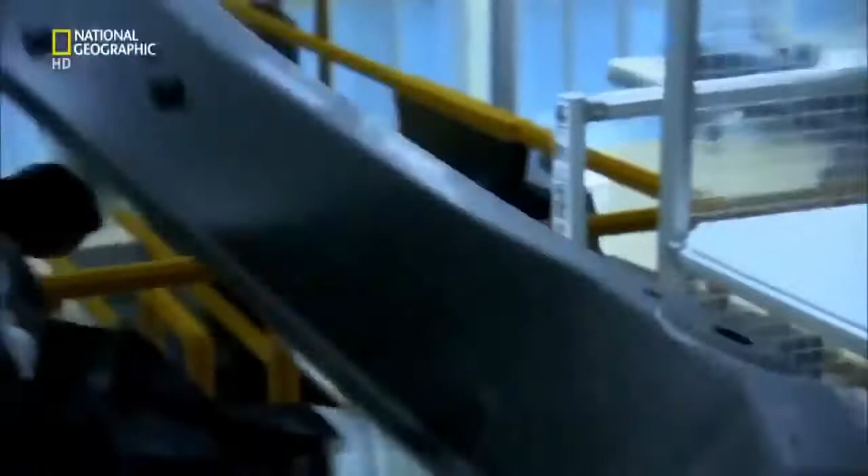To reach their goal, the tight-knit team utilize sophisticated tools and materials to build the car. The most important of these is carbon fiber composite. Carbon is crucial to the car's performance. It's a material 5 times the strength of steel, yet a quarter lighter. It's the construction material of choice for both Formula One racing cars and the aerospace industry. The company even make their own carbon fiber here on site. Up until now, no television cameras have ever been allowed inside this top-secret facility.

Passion, an emotion that isn't in earlier Lexus cars. We wanted to move the brand in that direction. That's how we made this car. Tanahashi believes the marque can mean more than just luxury. I wanted to make a new sports car, one that could stand against the long-established European so-called supercars, Porsche, Ferrari, and Lamborghini, to show that we Japanese could make something like that.

It's a risk. The company haven't made anything like this before. Their reputation depends on its success. Chief Engineer Tanahashi is stepping into the unknown. He must build a car, a team, and a factory from scratch. Basically, we proceeded at my discretion. And where there weren't any rails, I laid them down.

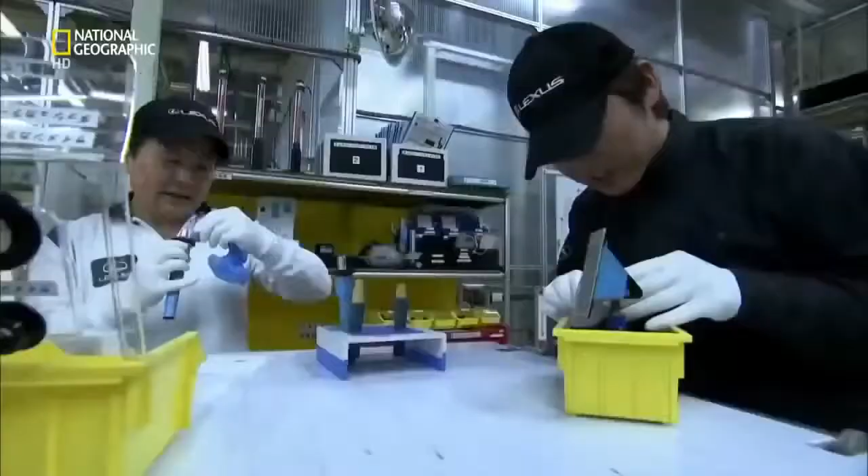All the associates here at the LFA works feel they are artisans, not just operators. These artisans are known as takumi, Japanese for craftsmen, a status only conferred on the most highly trained, skilled workers. Each and every associate at the LFA works is seeking to achieve perfection, taking this challenge on with a sort of samurai spirit.

Inside this top-secret megafactory, a car like no other is taking shape. Craftsmen hand-build what they consider an automotive work of art. Money is no object. This machine must redefine a billion-dollar brand. Failure, not an option. Japanese marque Lexus sells itself on luxury, marketing its cars as elegant, quiet, high-tech, and efficient. Now, a different kind of car wears the Lexus badge, the LFA.